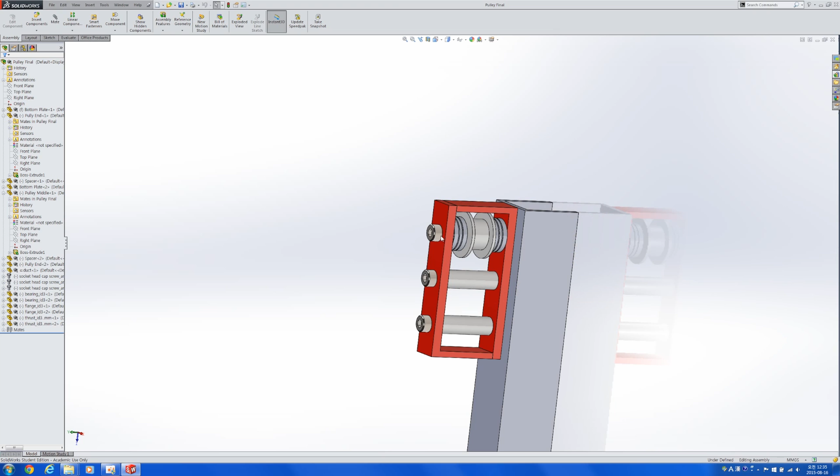Hi everyone, this is kind of where we left off last time. Now that we've decided which bearings to buy, it's time to finalize our designs for our 3D printed pulleys and boxes.

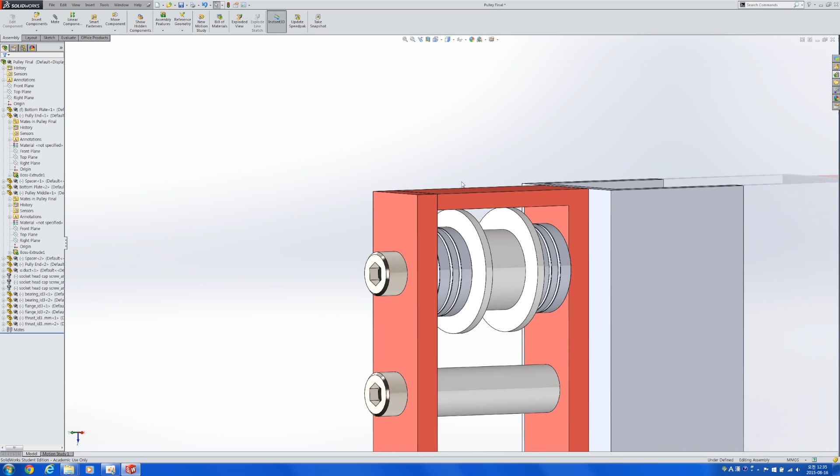Something you'll find out is although 3D printers are usually great at replicating sizes, they're really bad at making holes. For example, if I define the hole on this part to be exactly 3 millimeters large, this bolt will not go in.

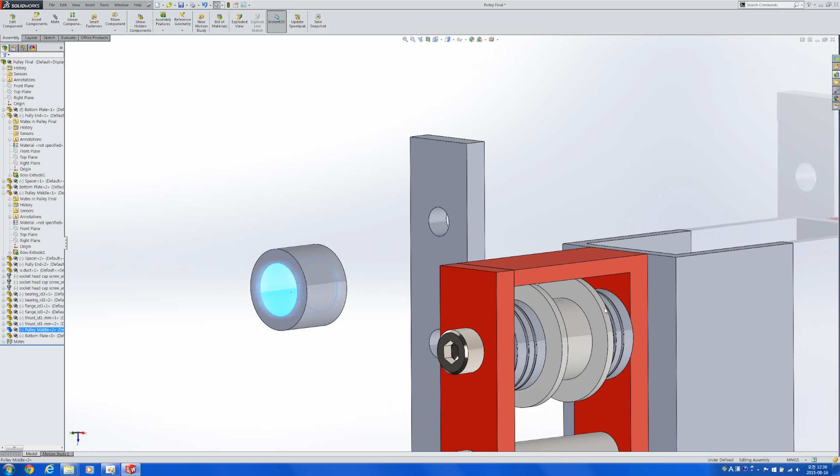For holes this small and parts this big, that's usually not a problem because you can just put a drill through it. However, what if you want to make this exactly fit the bearings that we have?

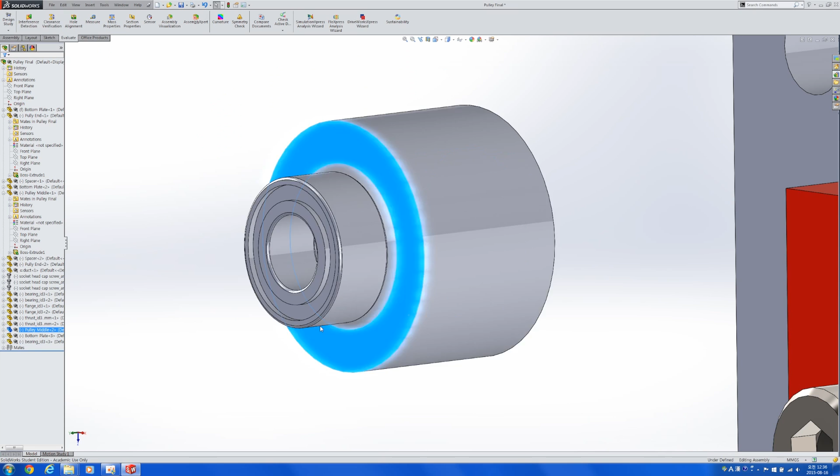These bearings have the outer diameter of... let's go check. Outer diameter of 6 millimeters. How large should the circles in these pulleys be to safely accommodate this?

That is not an easy problem to solve because all CAD parts are usually different. So when this becomes a problem, it's best to print out something very simple that serves as a reference design. I'm going to show you making one right now.

To start with, let's put a center line all the way through, and make a few random circles. That was too big. 1, 2, 3, 4, 5.

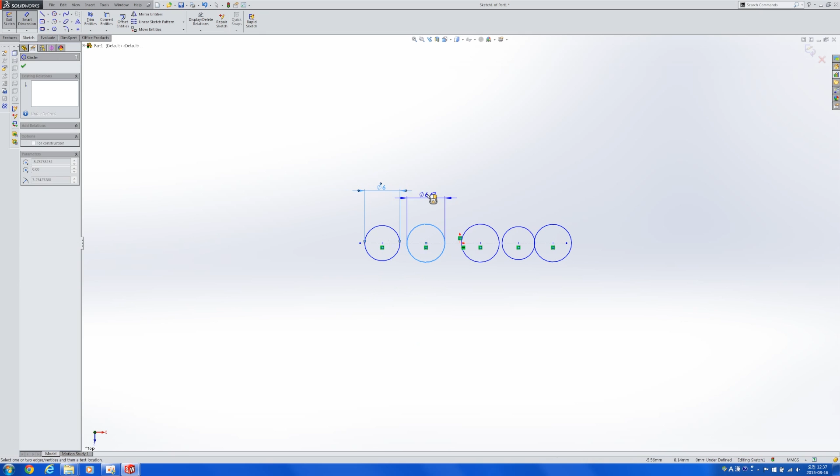Let's define the size of the first one to be 6 millimeters large, and the ones thereafter increase by 0.1.

Everyone's 3D printers are different, so this is a good way of checking which specs you may need to use for your 3D printer.

Give that 8 millimeters of space. Here as well. Here as well. And here as well.

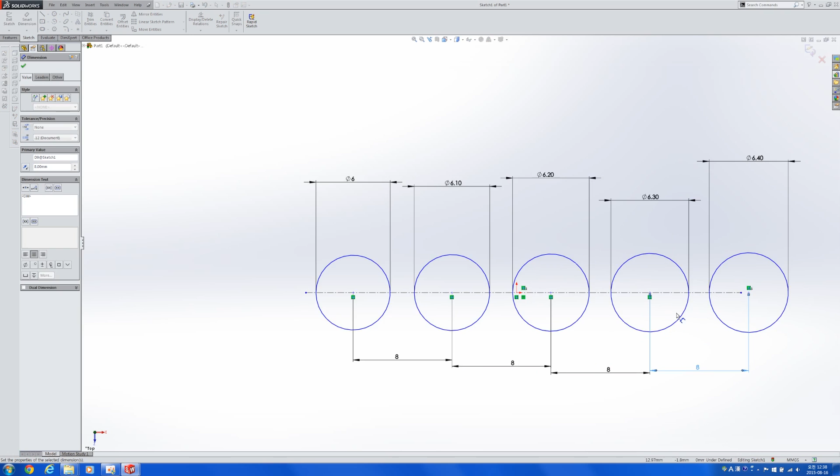Then for all of these, we're going to use the offset entities feature, make them 1 millimeter larger. After this, we're going to extrude it. Let's increase this to 8.5.

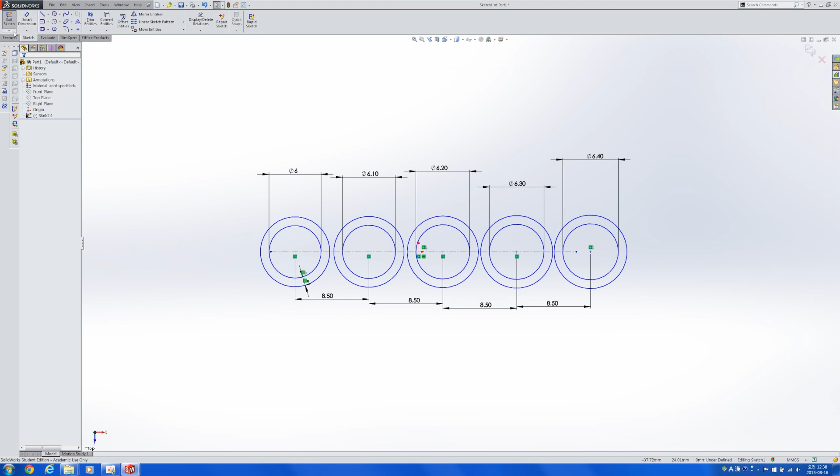Let's extrude it for just 2 millimeters, like this, so that when you actually print it out, you can put in the bearings here to check which one fits the best.

This looks like a very simple design, but it's important because the data you get from this can actually serve as the data you rely on the next time.

For example, if you're going to make a hole around 6 millimeters large, from now on you know which numbers to put into SolidWorks so that your 3D printer replicates it the way you want.

So now what you need to do is save this as an STL file and go print it out on your 3D printer. Let's try doing something like that.

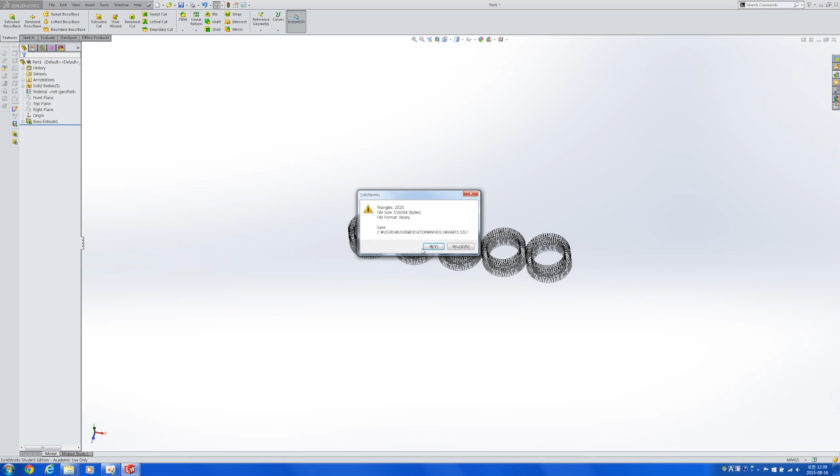Save that as an STL file. Go and open up the CAD. Go and open up the 3D printing program, and later on, go and just click print.

And after it is printed, you can go try to put the bearings that you have and fit them into those circles.

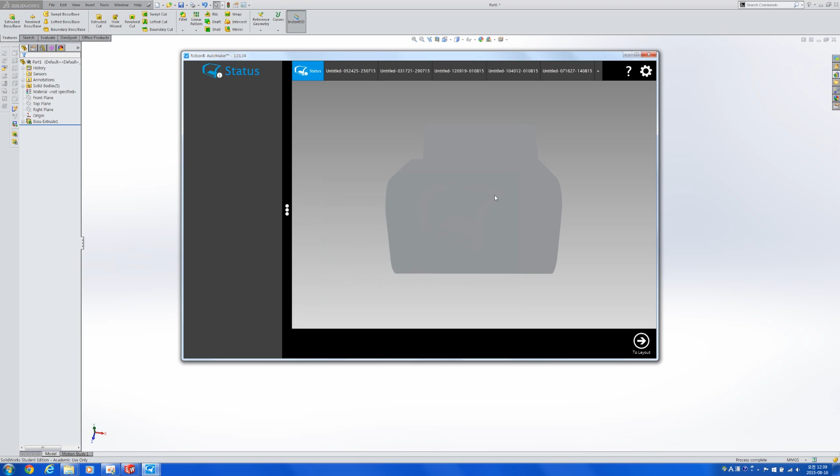This is not very hard, but it may be crucial for some designs, especially if this is the first time you're making something on a 3D printer.

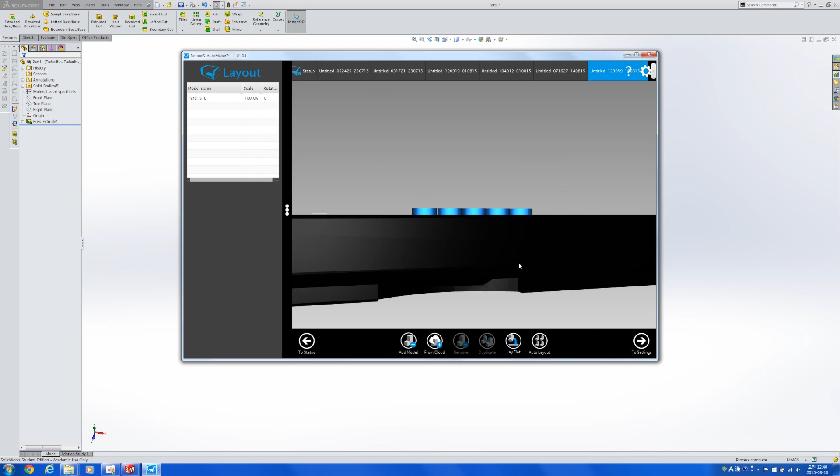So you can go ahead, print that out, and try it. And it's not just this - if you have parts that you can't fit, that are very difficult to drill into, you may need to do this test for even the spacers we have for drilling.

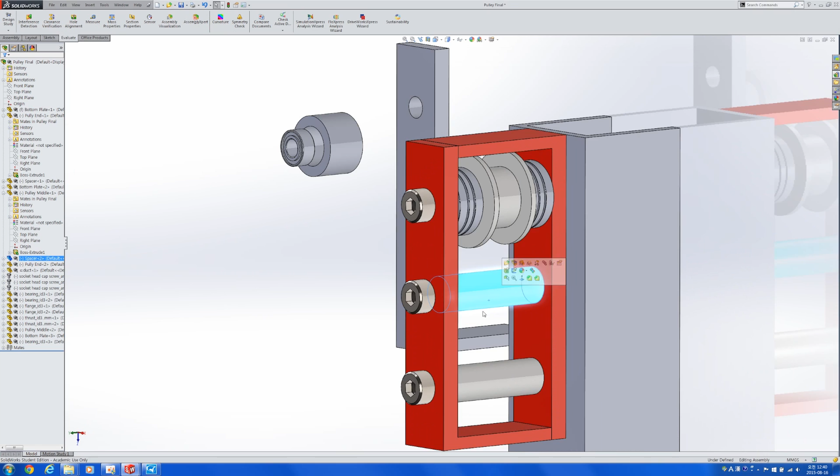Even for the spacers that we have for using the bolts - these will be very difficult to hold onto if you need to drill a hole through them.

Something very similar to what we're doing here right now may have to be done with these. But remember, once you're done experimenting with the values, make sure to write them down so you don't have to do this again next time.

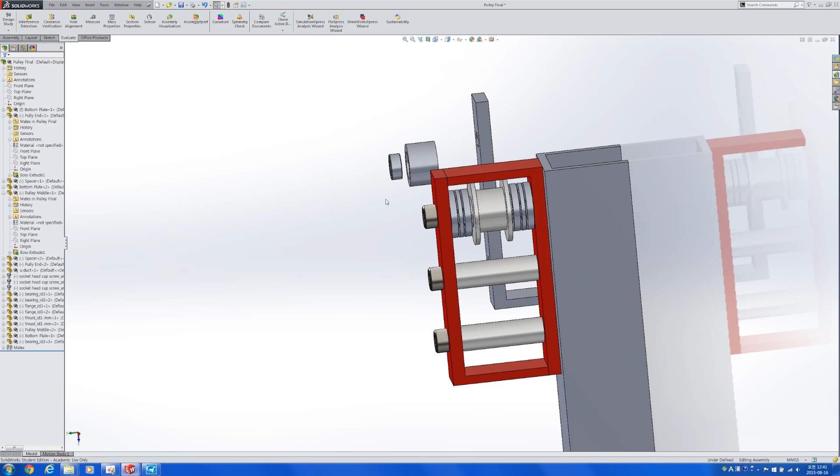That concludes the video for today, and next time I will be talking about how to make these parts actually better for the 3D printer to make, and also better for you to use. Thank you.